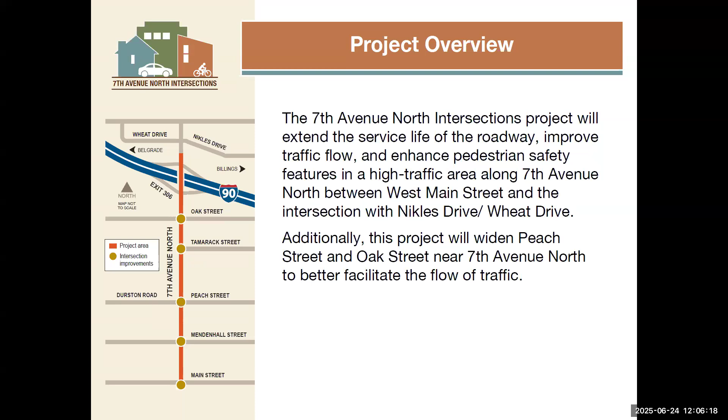Thanks, Dave. My name is Chad Mosel, and I'm the project manager for the 7th Avenue Intersections project. MDT is making improvements to a busy section of 7th Avenue in Bozeman between West Main Street and the intersection of Nikles Drive and Wheat Drive. This project includes a crack seal and a seal and cover, or chip seal, in addition to milling and paving to address rutting at some of the intersections through the corridor. Two intersections with 7th Avenue North, Peach Street and Oak Street, will be widened as part of the project to better facilitate traffic flow.

Construction is anticipated to begin in late July 2025 and will be substantially completed later this fall. The contractor will likely be chip sealing in 2026 due to weather and temperature limitations. This project will enhance the flow of traffic along 7th Avenue, improve the alignment of side streets, and help pedestrian and vehicle traffic move more safely and efficiently.

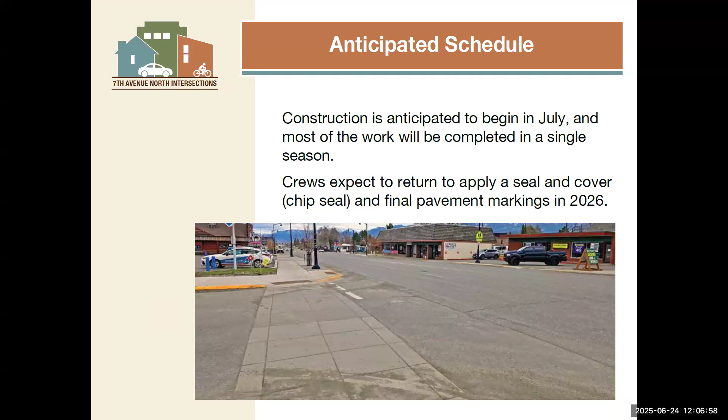Peach Street will be widened and the shoulder on Oak Street will be restored. This will change the traffic configuration of these two streets where they intersect 7th Avenue North. The signals at the intersections in the project will also be upgraded to help better facilitate the flow of traffic, including Peach Street, Oak Street, Tamarack, and Mendenhall.

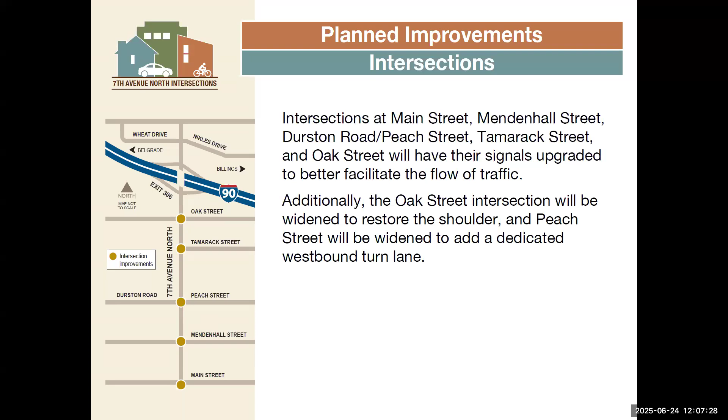Currently there are ruts in the driving surface of 7th Avenue North that affect both the ride quality and longevity of the roadway. The crack seal, chip seal, and resurfacing work will address wear and tear on the roadway and ensure the road can continue to serve the traveling public for years to come.

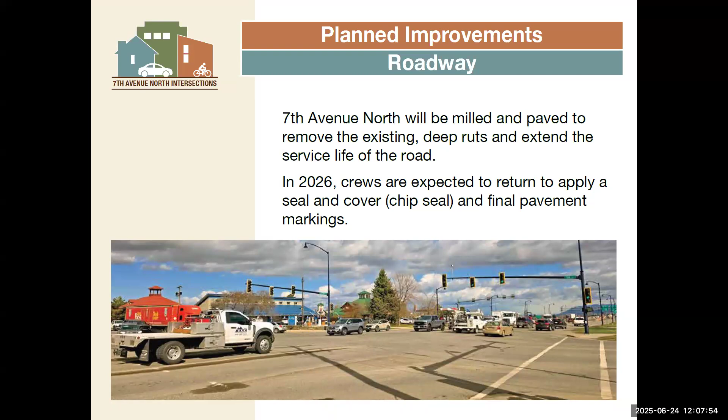Sidewalks and signals in the project area will be upgraded to be Americans with Disabilities Act, or ADA, compliant. These upgrades will help pedestrians travel through the project area with improved safety and ease of use.

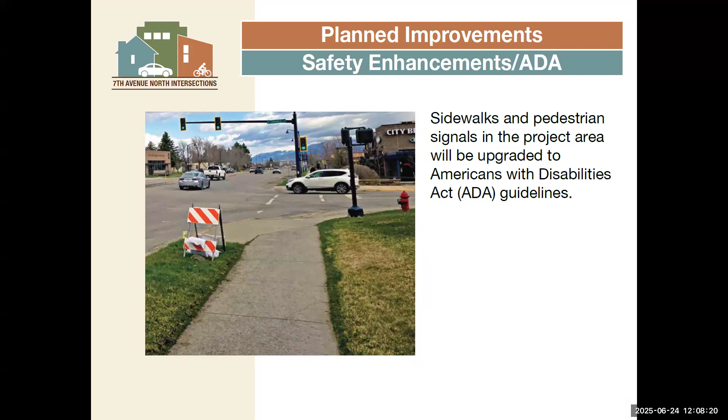During construction, traffic control may shift and change, but in general, motorists can expect intersection sidewalk closures and pedestrian detours, brief on-street parking disruptions during pavement work. Flaggers may direct traffic at times. We'll have temporary nighttime lane closures, reduced speed limits, delays at times, and wide loads may also be restricted at times.

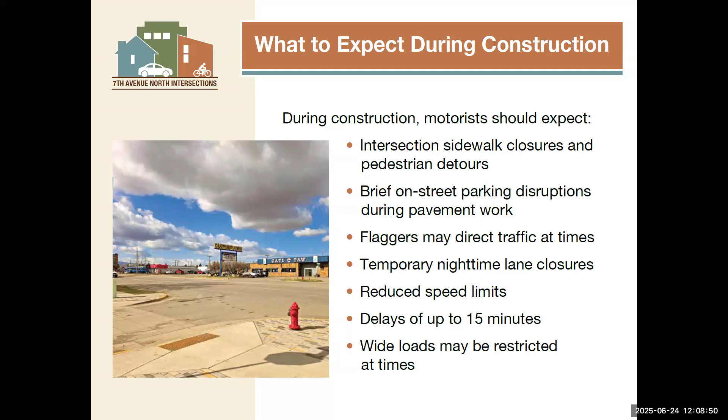At least one access to each business will remain open during construction. While the chip seal and paving are taking place, there may be periods of approximately half an hour where approaches must be closed to allow for proper curing of the pavement and the chip seal.

Now I'll turn it over to Andy Barsness with RBCI to discuss the next steps.

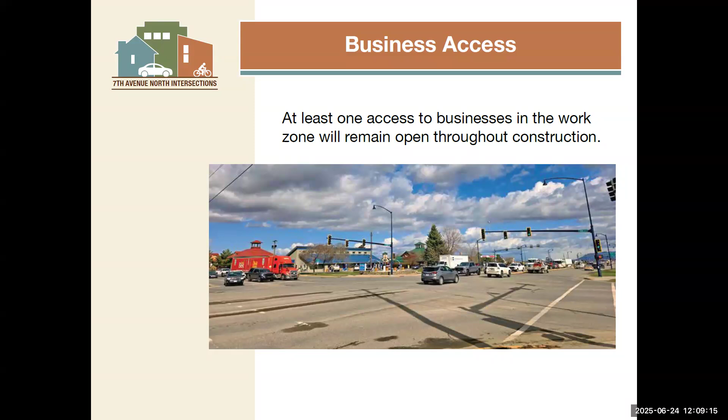Thanks, Chad. Keeping the public informed throughout project construction is a high priority for MDT. MDT is planning to use a variety of methods to communicate with the public during the construction of the project. These will include mailers, news media, social media, email, text messages, and updates to the project website. Information to sign up for construction updates will be available on the next slide. Another tool for getting the most up-to-date information about construction and road conditions throughout Montana is the 511mt.net website and app.